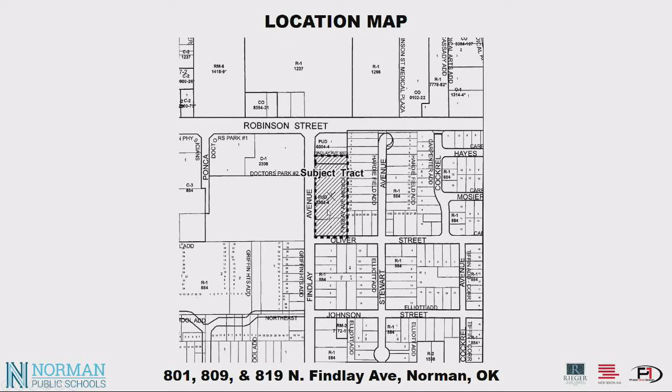So this is the location map. This is the old building we call the Bethel Building, over by Norman Regional Hospital off Findlay, just south of Robinson—you see Robinson at the top of the map. This is the platting map, so it doesn't look very recognizable, but the site is right here, just north of Oliver Street and next to Findlay Avenue.

The existing 2025 plan, the comprehensive plan for the area, shows blue as institutional and orange as office—predominantly office, which is mostly medical office, and blue institutional, also predominantly medical and county fairgrounds at the top. So medical and county fairgrounds are generally west and north, and R1 single family is to the east and south of this site.

Our site is right here—you see 809, 819, and 801. So 2025 is currently office. The zoning on the right is a little misleading because the current zoning map shows the hospital as R1. Obviously the hospital is not single-family residential, but that's the technical zoning. The site we're on is zoned PUD, which currently allows for medical and emergency services to be built there—obviously not the plan anymore, with the hospital transitioning to other parts of the community. So that's the current zoning.

This is probably the most recognizable image, which will help you orient yourself. This again is the Bethel Building. The site is outlined in red, covering the entire area from Oliver Street up to what is now a vacant lot—they're showing a house there, but that's no longer a house, it's simply a vacant lot at the north end. Then the hospital is to the left—Norman Regional Hospital Healthplex over here, office building right here—and you get up into the fairgrounds just north of Robinson. R1 single family is to the right and to the south.

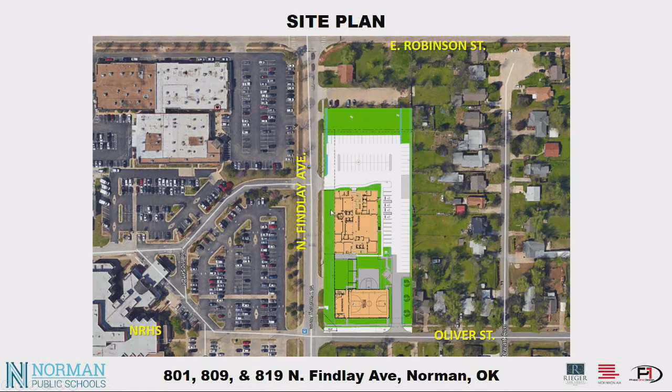This becomes fenced around the playground area, right around here, and this all just remains as green space all around the periphery. One thing I do want to show you, because it drove the design in a lot of ways, was the geothermal field.

This is a very unique building—you don't see these very often, but this one is in existence. It's a geothermal HVAC system, a cooling and heating system. The way geothermal works is they have these large, deep wells, and basically water or fluid sits down there, and the earth keeps it at a constant temperature. These are deep wells, and then it comes back up, and that becomes the temperature agent that keeps the building at a constant temperature.

You can't build over those, obviously—that becomes a pretty serious problem. So that area, which I outlined in red over here, is basically non-buildable because of those geothermal wells. We can't build over that red area, and thus we have this little lot up here, which is really vacant now, but it's pretty skinny.

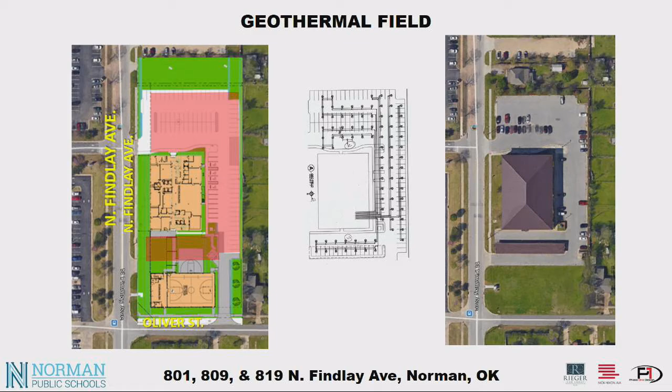And so really that meant this southern lot, which was the big, large, unused lot down here, became the location for the gym almost by default, because we certainly don't want to remove the large Bethel building—we want to use that. And so then the gymnasium became the southern end of the property, and that drove a lot of the design concepts.

A lot of this is in your staff reports, but I wanted to show it to you here again—that's the site plan in more of a technical showing. 2.39 acres is the entire site.

We're changing to a SPUD. It was a PUD, and when it was designed as a PUD, PUDs used to be more than 2 acres. Now SPUDs are less than 5, so we call it a SPUD. You can think about them as very similar in a lot of ways, but this is a SPUD that would then allow for the school uses and do away with the medical uses it had before.

It's a repurposed building, and this is important, I think, because you're going to see probably a lot of these. I think Councilmember Hall and many will start dealing with this often around the Norman Regional Hospital site on North Porter.

I think we're going to have to find ways to repurpose and reuse these buildings as we go forward, so it's kind of exciting that we have one that's going to be repurposed in a positive way. Norman Regional Hospital, from the staff report, talks about it across Findlay, designated as institutional. County Fairground property as well, and it talks about all of these trending toward institutional uses and different uses from just medical.

Historically, schools are in close proximity to residential neighborhoods, that was in your staff report too. And actually, we know that many schools are very much embedded totally within residential neighborhoods. Many elementary schools, middle schools, and even some of our high schools are right next to them, so it's actually a very good use to be next to or within a residential neighborhood. As staff noted, this would actually be a less intense use than the currently allowed uses of medical office, which if you've ever been around medical offices, some of those have really intense parking situations around them, you can see that sometimes. And emergency medical transportation services can have loud sirens and things like that, so this does away with those uses in that immediate area.

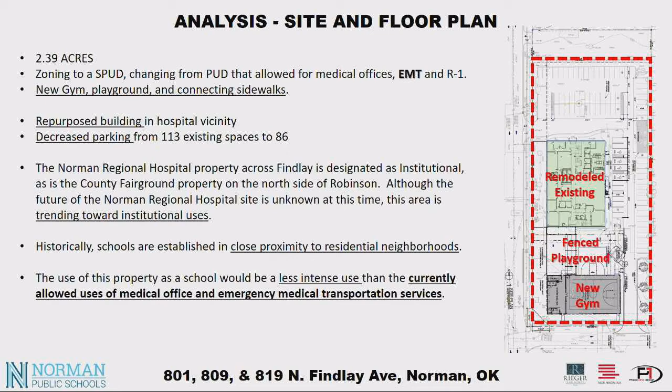I want to talk briefly about something I didn't mention at Planning Commission, but I could tell the Commission was very interested in it. This is for Dimensions, a school in the Norman Public School System, and I should mention Norman Public Schools is here tonight with us, as is the architect and developer. This is a unique and very important school in the Norman Public School System. I toured it when I went through Leadership Norman, and I hope all of you have had the opportunity to see it. It's a pretty wonderful program, basically an alternative education system that allows kids to have education in a different way.

I don't know when the last time they had a new building or facility was, maybe never, I don't know. But it's pretty exciting that they will get this, a gym, and this opportunity. Brand new, walk in there right now and it's all new sheetrock, mud, tape, and flooring. Some unique uses are being put in here that they don't have right now. They will have a cafeteria for the first time; before they didn't have an actual cafeteria set up.

They will have a food pantry for students to take food home. This is important in the Dimensions program, so they will have that in a discreet, private, careful manner. Then they will have private shower facilities—some of us take that for granted, but this will have it, for kids that need that when they're away from home or have no home. This will have a counselor wing with a very private situation so they can come to the front, obtain counseling privately, and go back to class.

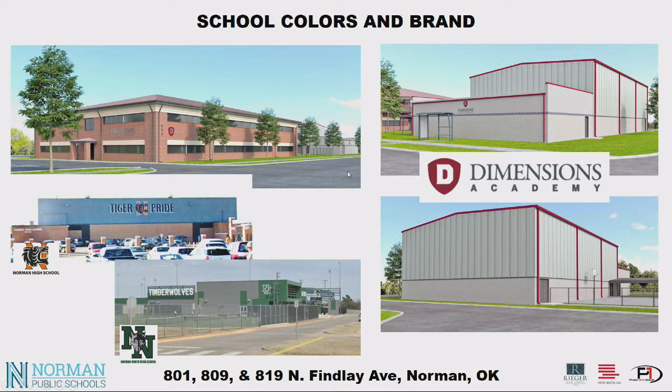Another important thing that's happened over the last few days, and I very much appreciate Councilmember Hall in helping us through this, is that this is in the Porter Corridor Zoning Overlay District. I don't know that we've dealt with that in years.

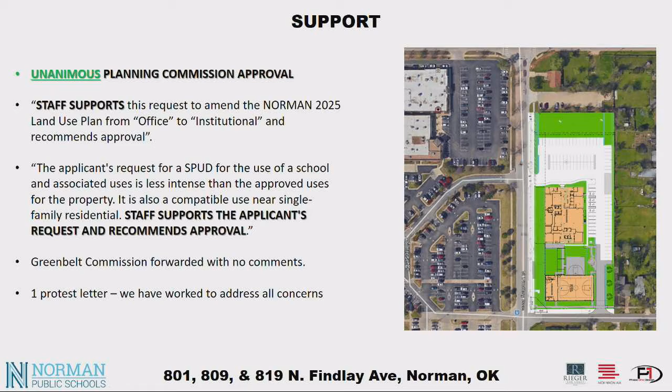The second point was really the next three points, in combined fashion, were the wall, the trees, and that edge that I just showed you. I think we've met the spirit of everything in that letter as far as I can tell, and I believe the neighbor and her representative are pleased with that outcome as well tonight. So that's the summary of it. I'm happy to answer any questions you have, or show you whatever else you'd like to see. Thank you very much for your time, and we'd appreciate your support tonight.

Are there any questions from council regarding this item?

Councilmember Hall: Good evening, Mr. Rieger. I just want to move through some of the points you've already made, for clarity's sake, because there have been quite a few moving parts over the last few days. First, I want to thank the applicant, Norman Public Schools, for continuing to work through the concerns with the neighbor and the neighborhood. I think we've been successful in accommodating most of those things. But just for clarity's sake for council, I want to move through a few things.

Okay, so tell me about the number of students you expect to be enrolled at Dimensions Academy. I believe it was about 150 was the last number I heard. Is that right, Justin, roughly? That's the most we've had. That's not the average amount of students we serve currently—it's less than 100 on average.

And the number of staff members? That's around 25 to 35 staff at any given time. So compared to other elementary, middle, and high schools in Norman, that's significantly smaller. The only comparison would be Lakeview or Wilson, which would be double the size. This being a smaller school, again a reminder that it serves kindergarten through 12th grade potentially. Okay, thank you.

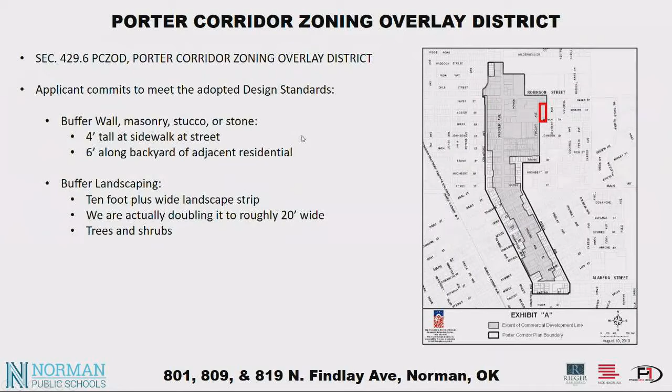Now, there's an operational aspect in that Norman Public Schools buses are required to come and go as quickly as possible to a controlled intersection, that being the Robinson at Findlay traffic light. So the site design aspects tend to make it as simple a path for the bus to get through the site as possible, just one turn, a wide turn, down to the most natural location for a curb cut.

Then you take into account the requirement of a controlled intersection. The buses would come down from Robinson to this point, make one easy left turn in, one wide path turn, go on down to Oliver, but immediately come back to Findlay and back up to Robinson. That's a long way around to answer your question, but all of those factors combine through design and operations to determine how that works.

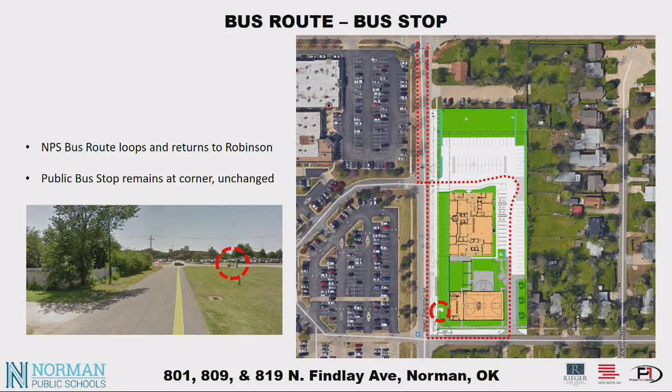Okay, thank you. I think you also addressed the change to building the buffer wall as stipulated in the Porter Corridor Zoning Overlay District. You'll be addressing the drainage issues too. I had asked for clarification, and it was explained that water flows from the homeowner's property following the elevation down to Findlay. Is that correct? Correct. So you are accounting for that with your potential design for the buffer wall.

Correct. I was just talking to one of the neighbors. There's a wall in the area you could consider as an example. It doesn't show up here, but there's an apartment complex being built, a senior housing project, that actually has that system alongside it. It's a panelized masonry system, with piers or columns, and in between them the masonry panels are supported so they can be off the ground for that location.

So on the existing property on the middle lot, there already is a constructed brick buffer wall, and this would just be a continuation of that wall. Will it be similar in design and an extension of that? No, we anticipate that it will be different.

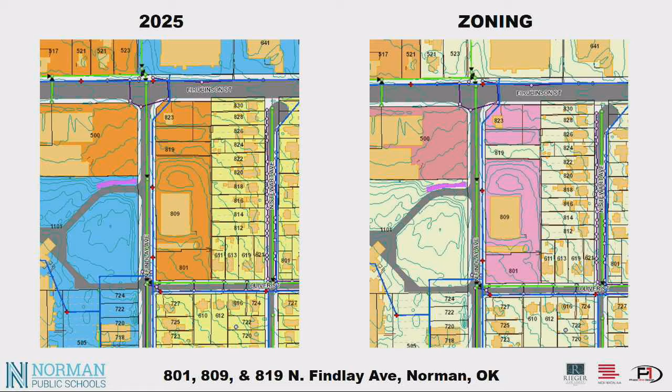I also just wanted to publicly thank you and the applicant for agreeing to move the dumpster. That was also a neighborhood concern that you were willing to address, so we appreciate that happening.

There are several other questions. What is the impervious surface coverage for the project? It's about 65%, I can give you an exact number if you want, but roughly 65 point something. R1 allows up to 65% as well, so we're not changing the R1 requirement.

And then I think we've also touched on this too, but because of the nature of this school, Dimensions Academy, what is the expectation of evening activities, and what kind of evening activities will take place?

I don't think they have many. Justin, do you want to talk through it, since you have more information than I do? So the evening activities - this is not a competitive sport, so there's no sports really scheduled in the evening. Outside a parent conference on occasion, the night activities are really limited or minimized. Okay, thank you, more representative of what you would see maybe at an elementary.

Okay. Then I want to move to the third undeveloped lot, I think it's 819 North Findlay. I don't have a current visual - it shows a house there. There's not a house there anymore, it's currently an empty lot.

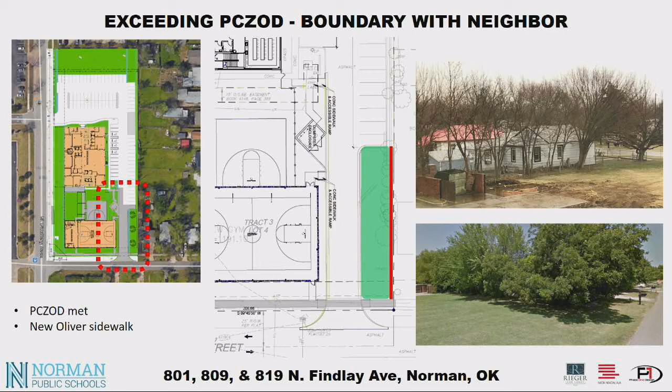Councilmember Wilson: You guys might have said this earlier, but how many students are served at this facility, or will be? I think Justin said the max is 150, but normally it is lower than that. Thank you, that's it.

Just one question, I think, on Oliver itself - is there a curb and gutter being put in? I know there's already a gutter. Are we planning to put a yellow stripe on it or not? I don't know if it meets that threshold, but with buses, not sure. I'm seeing a no from Mr. O'Leary. Okay, that'll be coming up. That is really the only question I had, so thank you, Sean.

Are there any other questions from council? This is an opportunity for members of the public to make comments regarding this. Okay, sorry, Councilmember Hall has a question.

I had a question for Ms. Hudson. I'm sorry. Good evening. Good evening. I just have a few questions.

The first one is, I know we've had a lot of moving parts over the last couple of days, and the document has changed considerably. So I just wanted to make sure that the document submitted late this afternoon is actually meeting the requirements for the Porter Corridor zoning overlay district as far as the planning department is concerned. Correct, I looked at it earlier - I'm looking at the red line copy - and they had taken that previous verbiage out, and now it says the applicant will install a masonry border wall along the southeast border of the property in order to meet the requirements of what I call the PCZOD. So they agreed to comply with that, and the applicant's landscape buffer exceeds the requirements of the overlay district.